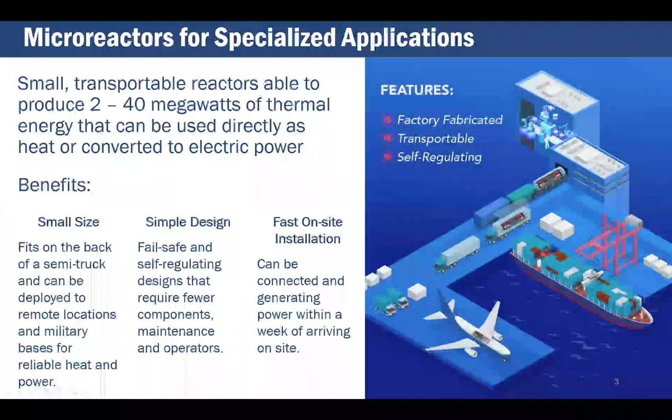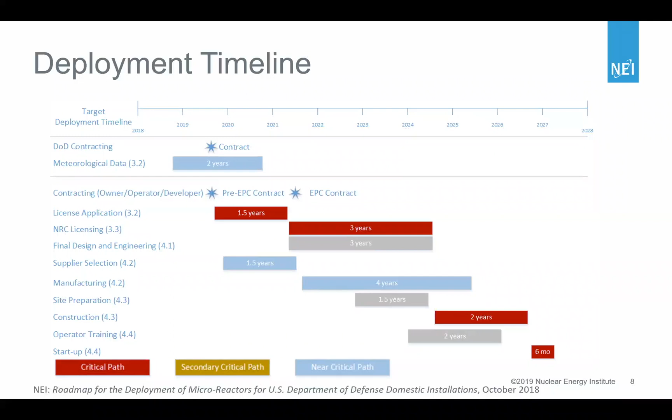And we think there's a lot of opportunity to accelerate this schedule. So we were a little bit conservative, and had our NRC licensing at 3 years. We think it can be done faster than that for microreactors, and even the manufacturing and construction time we think can be done a lot faster. Great things are happening in that area. Well, let's go to the next slide.

We also looked, as part of the timeline, at what are the challenges facing the deployment of microreactors. The only one that was a very difficult barrier to get through is the fuel supply; most of the others really just impact the timeline for the microreactor developer. They weren't showstoppers. The fuel issue is that most of these microreactors rely on high assay, low enriched uranium.

That's uranium enriched up to 20%. It's low enriched uranium, so it's not a proliferation concern. But there is no commercial supply for that fuel. And so the chicken and egg question is, how do you get the fuel if there's no reactors to use it? How do you build reactors that need the fuel if there's no supply for it?

The answer is that we need the Department of Energy to provide an interim supply and help a commercial supply become available. DOE does have access to fuel that could be used for those purposes. But this shows up in the timeline, and it represents one of the longer lead time items for the deployment of microreactors. The other challenges were the speed at which industry can develop designs, the speed at which customers are able to move and make decisions, and the ability to leverage the technology of microreactors to get some streamlining benefits in the regulation of them.

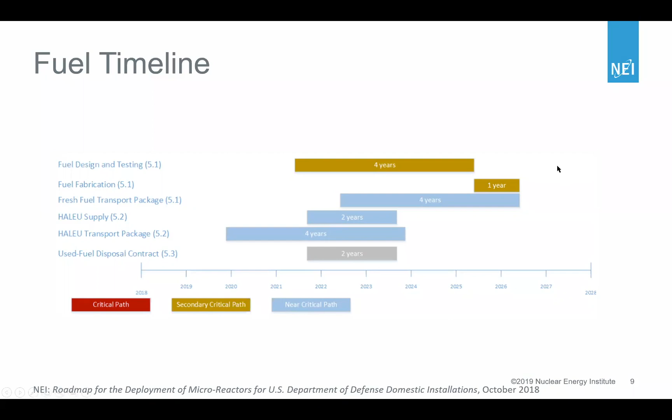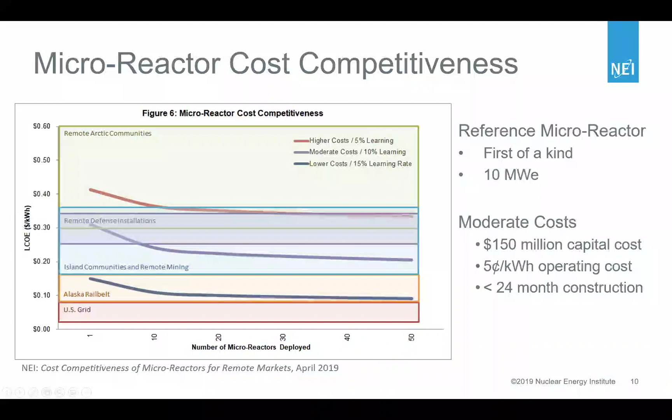And then the third study we looked at and put together was how to streamline the regulation of microreactors, because we recognize that the regulatory process that's in place today, while it is capable of licensing microreactors, that's not a concern. It was designed for large light water reactors, a very different technology, and so it's not best suited for regulating microreactors. We evaluated all of the particular areas in which microreactors would be regulated and put together our priority list of topics, because they're the ones we felt were most needed to be addressed before applications started going into the NRC.

Just generally, it's the review scope, duration, and level of effort. The NRC standard schedule is around 36 months, depending on the particular process you use, and we felt that microreactors could achieve something less than that.

Operator licensing: microreactors are planning on using automatic features such that the reactor can essentially adjust power and control and shut down itself without any operator, so the ability to take advantage of that was really important. The resident inspector, emergency preparedness, physical security, and aircraft impact are also included in those areas.

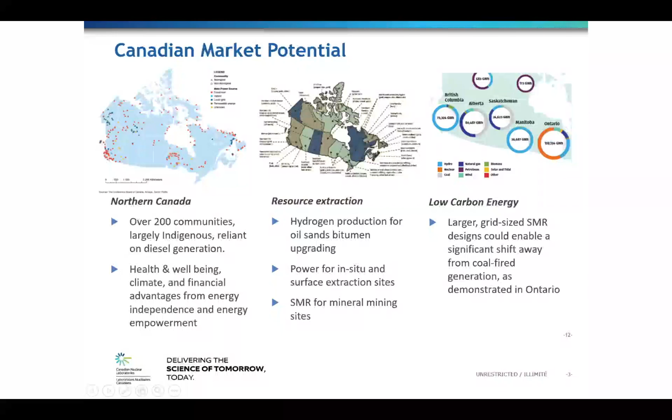Also, as part of Canada looking at this, we put together an SMR roadmap for deploying SMRs in Canada. That was a joint combination from the government of Canada as well as industry, and it was released in 2018. Next slide, please.

So at CNL, we recognized back in 2016 that there was quite a bit of interest both in Canada and internationally in SMRs. So we put together a vision. First we performed a market survey in 2017, and we wanted to understand what the needs and opportunities for SMRs in Canada were. Coming out of that market survey, we put together a vision for CNL, where we wanted to demonstrate the commercial viability of an SMR by 2026. We wanted to be recognized as a global leader in SMR prototype and testing. We also wanted to be recognized as a hub where multiple SMR and microreactor vendors could come, build, test and demonstrate their reactors. And last but not least, we wanted to host a demonstration project by 2026.

So in 2018, we initiated a 4-stage process to host a demonstration reactor at our CNL facilities, either Chalk River, which, as I mentioned, is in Ontario, or our Whiteshell facility, which is in Manitoba, a central province in Canada, above North Dakota.

So we put together a 4-stage process. The first stage is really a pre-qualification stage, then a due diligence stage, then stage 3 would be a negotiation of land use, and stage 4 would be the actual project execution. At CNL, we want to host the site and provide the land available, as well as help with the R&D to support the different technologies.

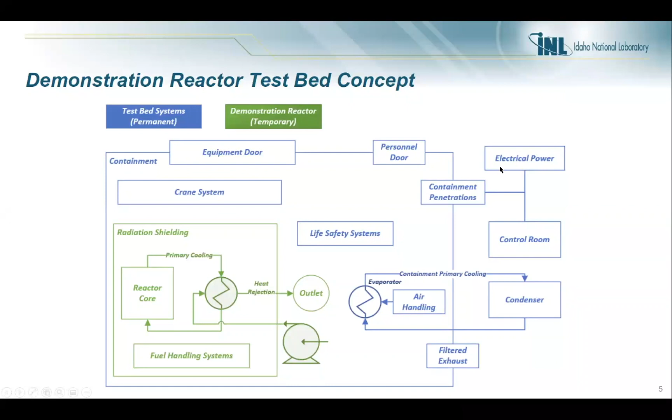The EBR-2 dome at INL is one of the leading contenders as a demonstration reactor testbed site. You can think about this one as the dome is a foot-thick concrete reinforced with steel plating on the outside, so it would act as a safety significant containment structure. We can do safeguards category 2 fuels there, so basically HALEU or LEU, less than 20% enriched fuels. There's a breakpoint in the DOE authorization space at 20 megawatts, so this facility would be good for machines that were less than 20 megawatts.

Right now we're leaning towards a 10 megawatt heat rejection system for the dome because it seems like it would capture most of the microreactor concepts that we're seeing. We're designing it so that it would be able to accept a standard Conex box, so 8 feet by 8.5 feet. There's some repairs that need to take place. The crane inside the dome right now has to be repaired. There's new penetrations that are going to be needed for stuff like communications and utilities. And then we also are going to have to add some security systems and things like fire protection and radiation monitoring.

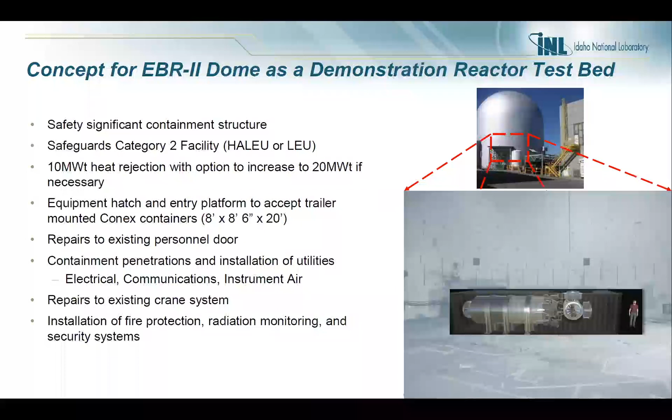So the other location that we're looking at is the former Zero Power Physics Reactor cell, or zipper cell, at the Materials and Fuels Complex at INL. We actually have started a pre-conceptual design effort to look at how this facility would be used as a test bed, and we're working with industry to define the requirements for this facility. It is a safeguards category 1 facility, so it would be able to accept reactors that have highly enriched uranium fuel forms or plutonium fuel forms.

We're thinking that this would be for very small systems, like 500 kilowatts or less thermal. It could be uprated, but there's some improvements needed, like to the roof. It also would need fire protection and radiation monitoring. The interesting thing about this is that you can go to a very small scale and verify physics, conduct critical experiments before scaling a reactor concept up for commercialization with a lower enriched form of fuel. This could potentially save a lot of money and increase the speed to demonstration for a lot of concepts.

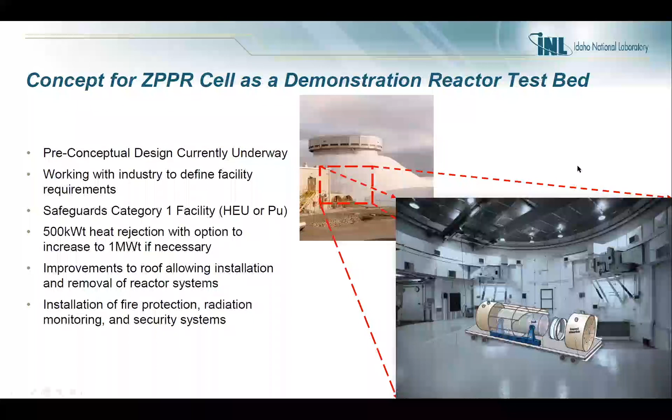And there's some other activities going on around risk reduction using the DOE authorization pathway for these demonstration reactors. So we're thinking about it in terms of: if you have a TRL2 concept and want to bring it up to TRL6 before going to NRC to commercialize it, these test beds and running them at a DOE site could be a great way to do that. There's a DOE pathway to authorize these machines that could potentially be faster and simpler for more experimental technologies.

We're also looking at how we can go ahead and start the NEPA process and shorten the timescale for getting the NEPA records of decision to operate these reactors, by using enveloped generic reactor characteristics and then being able to do a modification to that NEPA based on the specific reactor, as long as it fits inside that envelope.

We are preparing fuel production infrastructure. So if you have a reactor concept that's not a commercially available fuel form, or it's something unique where you only need a few kgs of it to do some experiments, or 100 kgs for your first reactor, well, we want to be able to do that and then work through the kinks on how you produce the fuel.

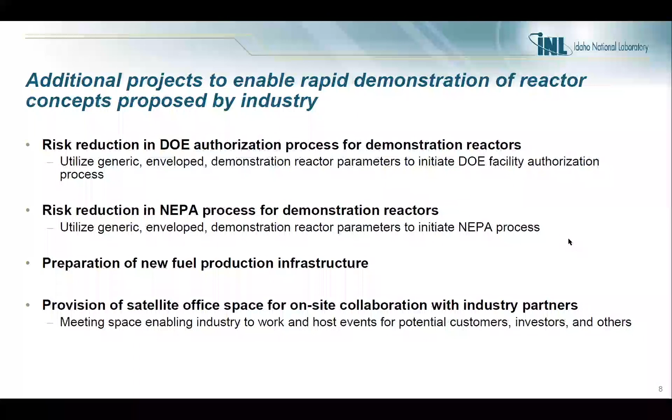And allow it to go to maybe an engineering or commercial scale up from there. Another interesting thing we're trying to provide is satellite office space for collaboration on site. There's something about being on the site out in the desert, close to where the actual construction is happening, that makes a big difference. And if we're going to have efficient collaborations with industry, we need to set them up so they can work alongside us. So it's really exciting stuff going on there.